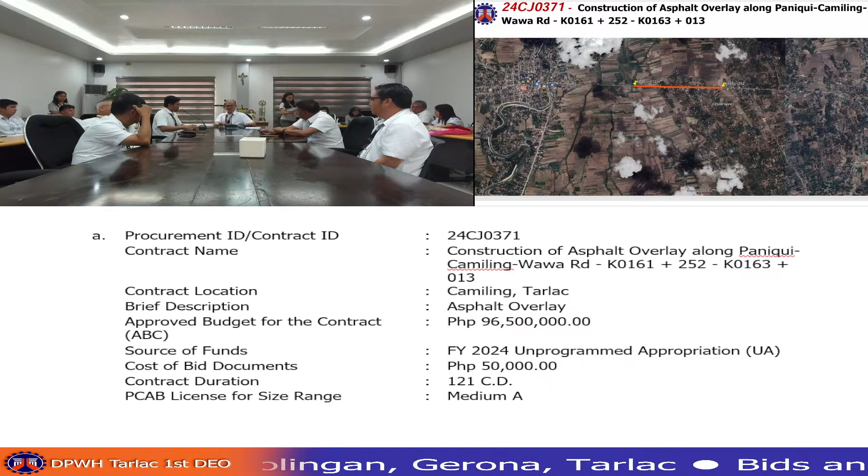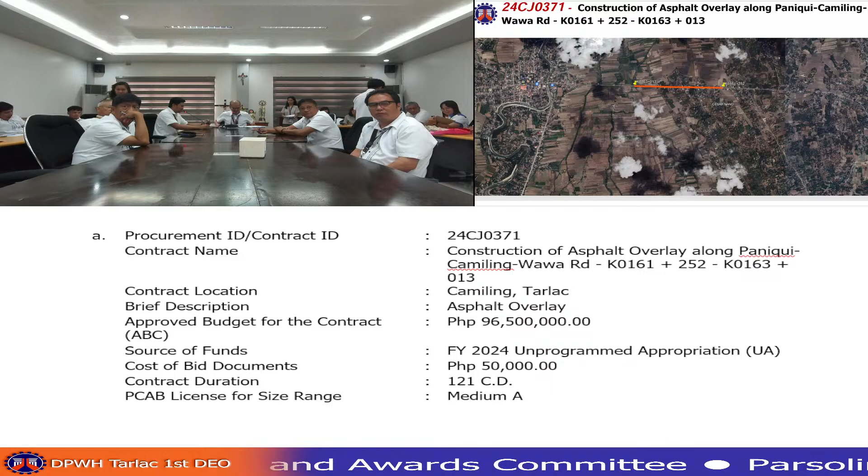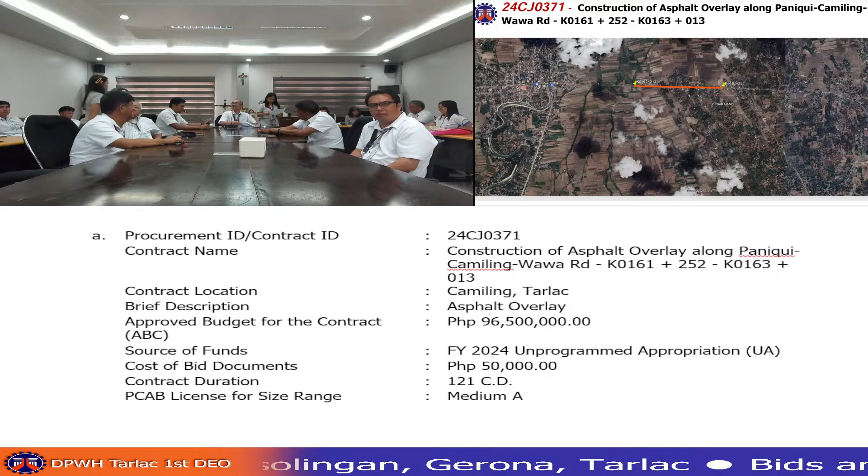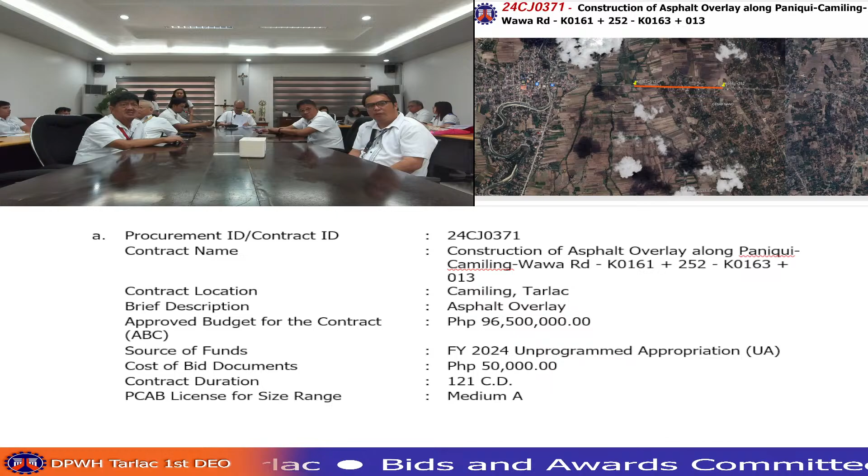For the contract ID number 24CJ0371 with the contract name of Construction of Asphalt Overlay along Paniqui-Camiling, Wawa Road from kilometer 161 plus 252 to kilometer 163 plus 013 located at Camiling, Tarlac. Scope of work with a target length of 1.765 kilometers or equivalent to 6.492 lane kilometer. Asphalt overlay of 4 lanes with a width of 12.3 linear meters and a thickness of 100 millimeters. Reblocking of deteriorated concrete pavement within limits, including application of reflectorized thermoplastic pavement markings white with a duration of 121 calendar days.

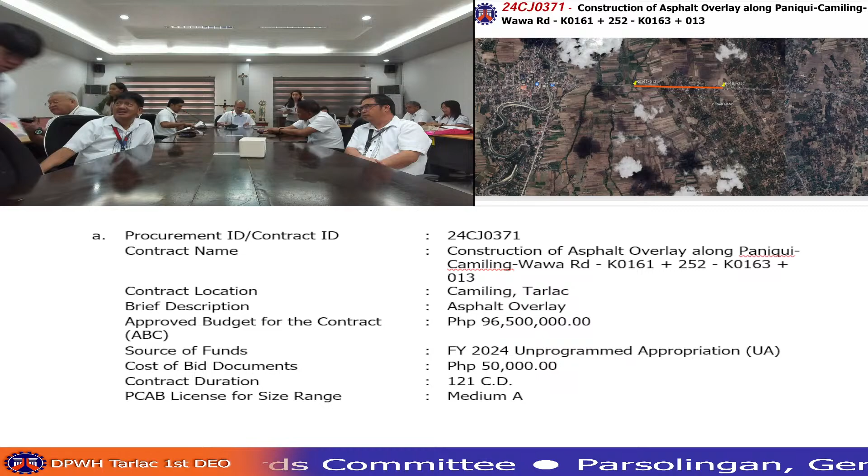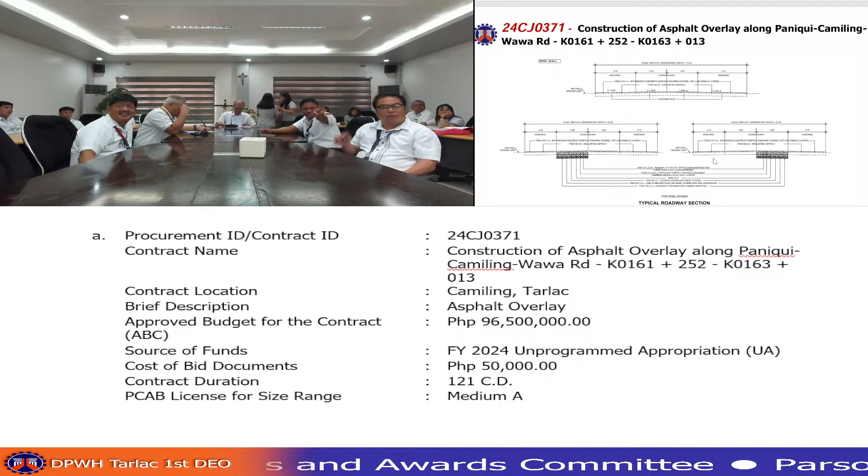Iflash mo yung cross-section. So, Engineer Aboy, wala ka bang tanong dyan sa cross-section? May nabanggit ka reblocking dyan? Eh, yung rotomill, meron? Wala. Meron ka pang project niya? Meron ka pa? Meron pa? Wala na. Ituloy mo na sana. Wala na. Oh. Okay, thank you, Engineer Tulang.

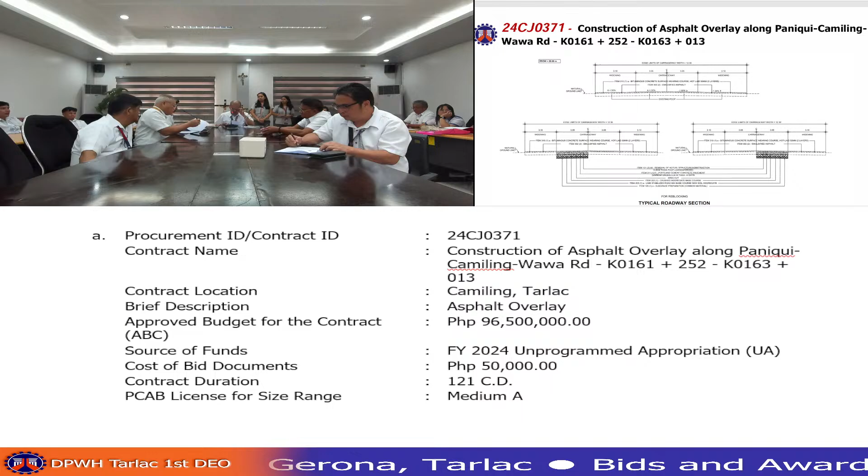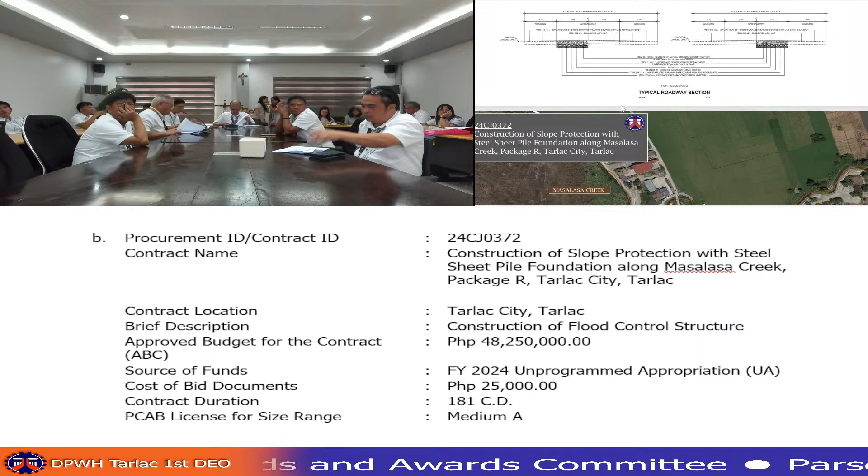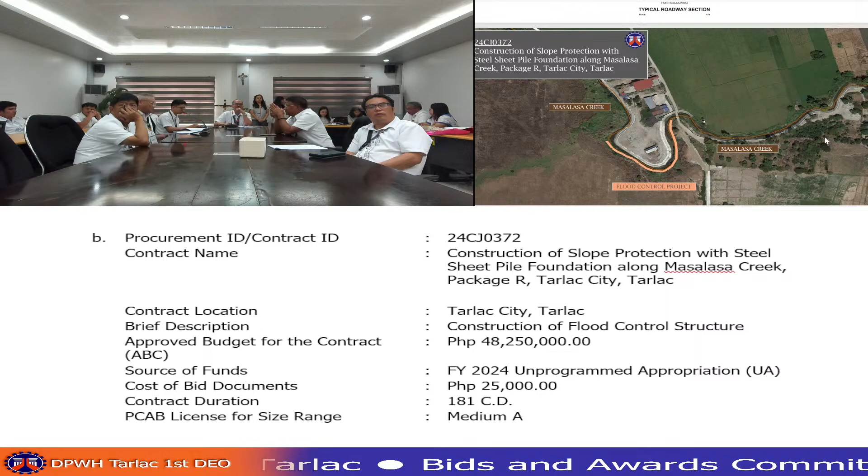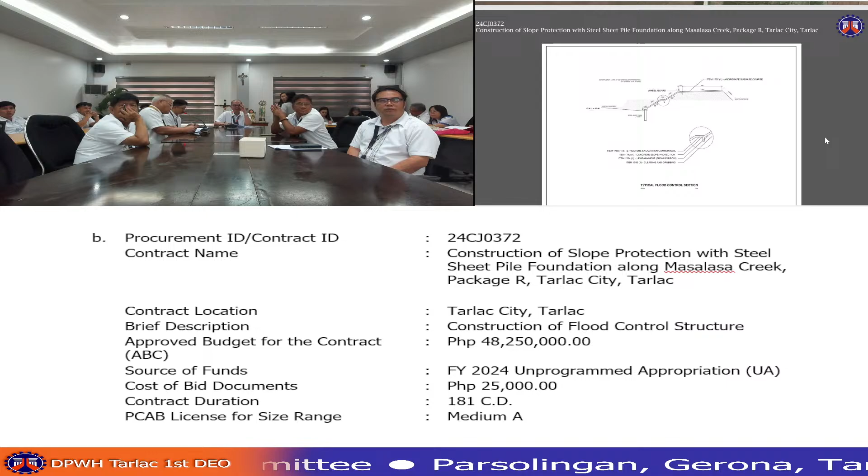The presentation also includes a typical flood control section which features a two-slope flood control structure with a length of 3.5 meters.

Wala tayong tanong? Wala po siya, sir. Agree. Yes po.

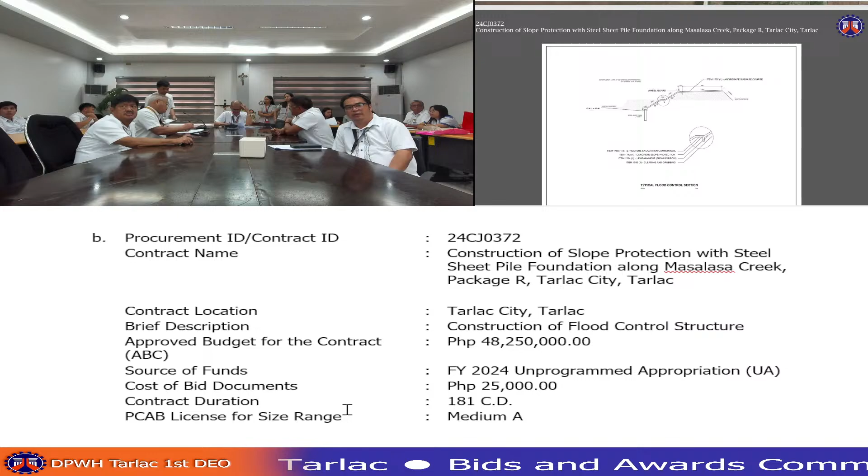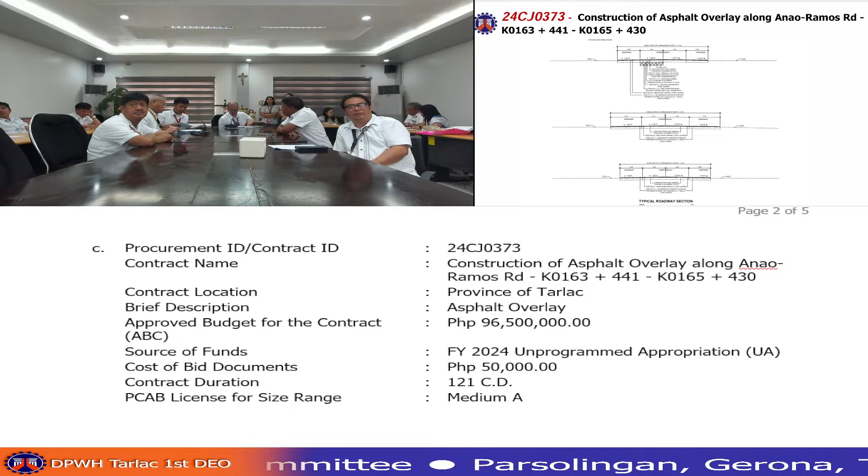Hello, good morning. For 24 CJ 0373, preventive maintenance asphalt overlay along Anao Ramos Road from kilometer 160,663 to kilometer 162,419 located at Ramos, Tarlac. And the scope of work has a total of 1.756 kilometer or 5.397 lane kilometer target asphalt overlay of 2 and 4 lanes with a width of 6.7, 10, and 13.4 linear meter and a thickness of 100 mm. Reblocking of deteriorated concrete pavement within limits. It also includes installation of single-arm solar LED roadway lighting with the specification of 12-meter pole, 3M mast arm with 30 watts luminaires and other road safety features within limits. Also includes application of reflectorized thermoplastic pavement markings, white and yellow, and it has 121 calendar days.

Oh, yun unprogram yan. Unprogram of operation yan. Saka parang dire-diretso siya, no? Miski na yung isa. Wala siyang exemption, no?

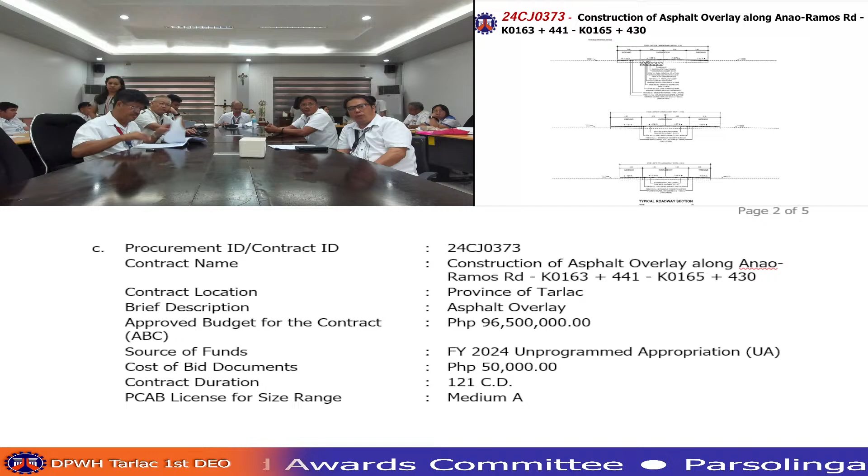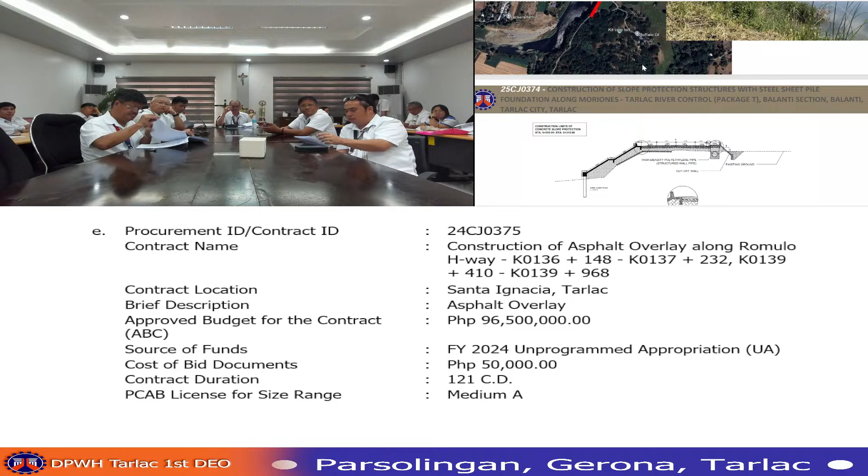The next one is 24 CJ 0375, preventive maintenance asphalt overlay along Romulo Highway from kilometer 134 plus 410 to kilometer 136 plus 148 located at Santa Ignacia, Tarlac. Scope of work, it has a total length of 1.733 kilometer or 5.920 lane kilometer target. Asphalt overlay of 4 lanes with a width of 13.4 linear meter and a thickness of 100 mm. And it also includes application of reflectorized thermoplastic pavement markings, white and yellow, and it has a total of 121 calendar days.

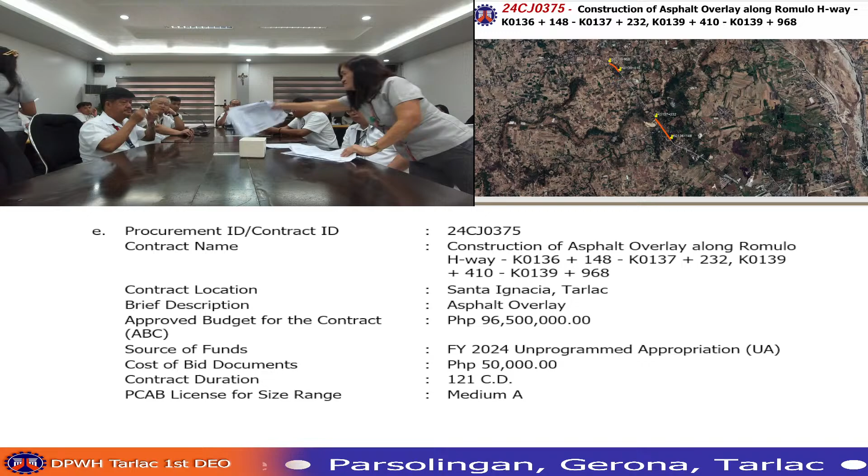So, meron siyang, pero based on that, meron siyang exemption ngayon, ano? Meron siyang exemption, ayan. Pero matanong ko lang, ha? Anong barangay yung sakop nung isa roon tsaka yung sakop nito? Dapat kabisado mo, kasi magkakartisikol ka sa kapitan, eh. May ano siya, meron siyang reblocking. Puro diretsong asphalt. Pero yung magbabakbak wala. O yung rotomill wala. Alright.

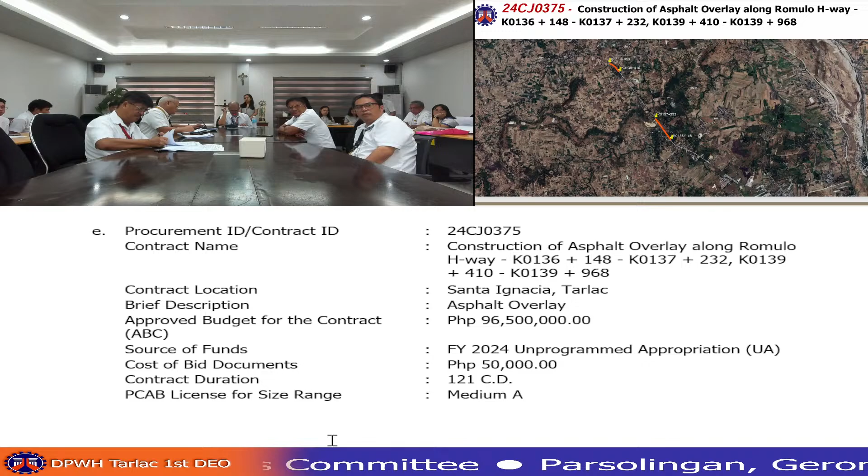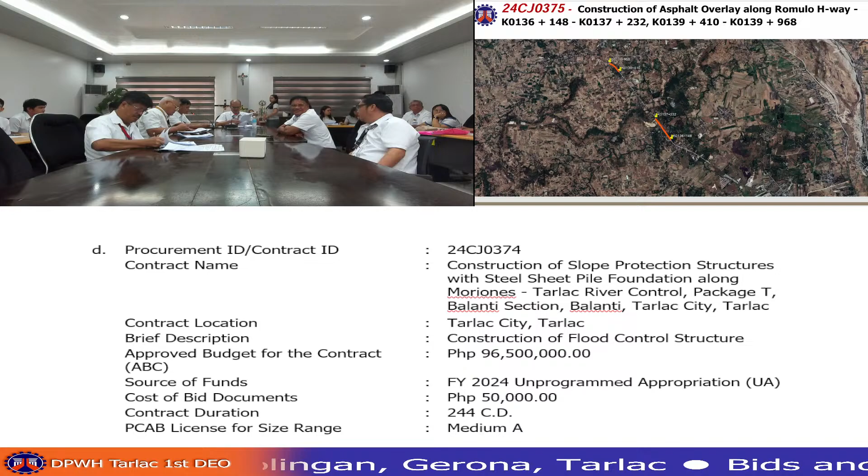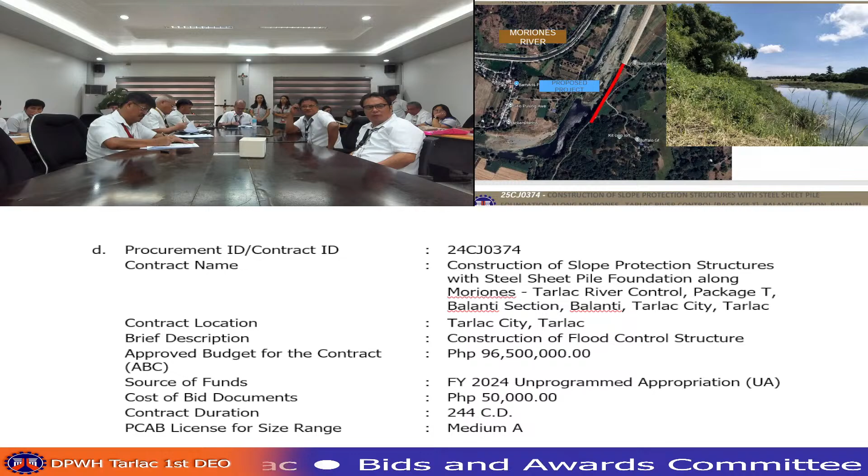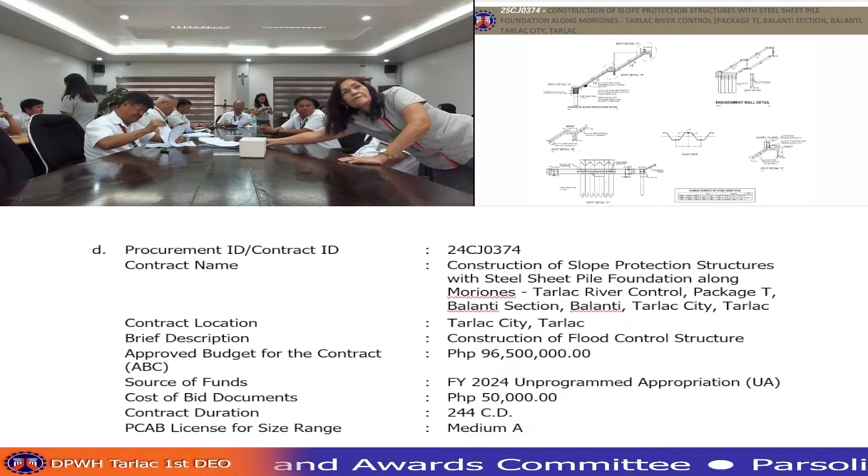I'm Zaldi Olivares from Planning and Design Section, and I'm going to introduce the contract ID 25CJ 0374, construction of slope protection structures with steel sheet pile foundation along Moriones Tarlac River Control, Package T, Balanti Section, Balanti, Tarlac City, Tarlac. It has a target length of 319 linear meters with a total project duration of 244 calendar days. The approved budget for the contract is 96,500,000. The scope of works includes earthwork consists of clearing, grubbing, removal of structures and obstruction, excavation and embankment, and crushed aggregate base course. Surface courses with 0.15, 0.23, and 0.30 meter thick of Portland cement concrete pavement with a width of 1.5, 4.67, and 6.7 meter respectively. Drainage structures with structured wall pipe high density polyethylene pipe 1000 millimeter in diameter. Miscellaneous structures with curb and gutter precast. Bank and slope protection work with the length of steel sheet pile to be used is 9 meters.

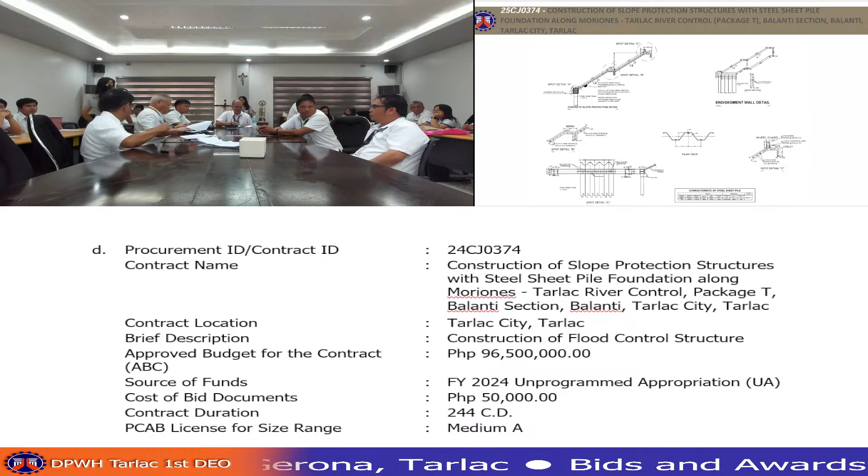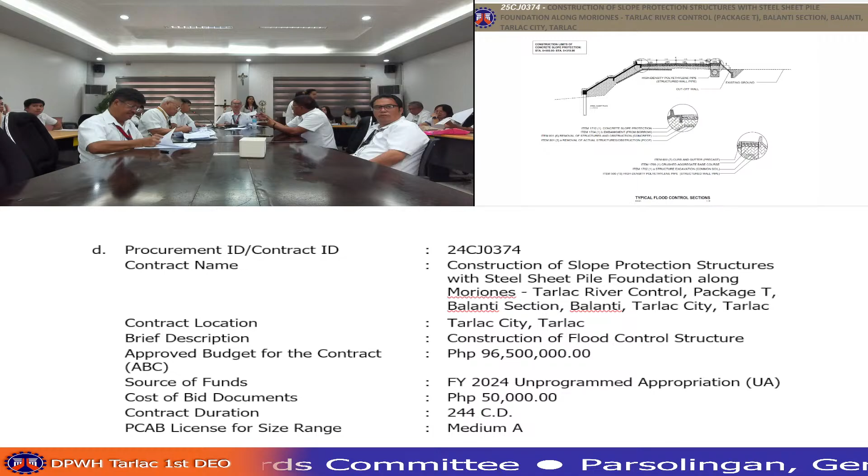Sige, pare, magtanong nga. Balanti section, sir, cross section, sir. Geotextile. Wala siyang wala. Ah, ano yung nasa ilalim na yun? Sir, may kwan dyan, existing na slope siya tapos may road. Kaya may kwan siya, removal of structures and obstruction. Yun ang tatanggalin. Yes, sir. Akala ko papatungan mo lang. Ibang kwan yan, sir, ibang design. Iba, okay. Sa may balanti, sa may grotto po banda yan. Wala siyang street light, sir. Yes, sir. Yeah, may existing po, apo.

Yes, sir. So, thank you.

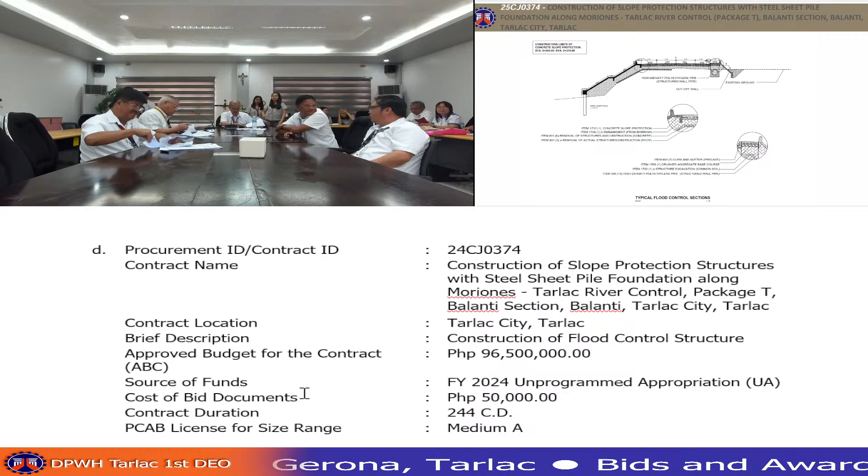Thank you, Engineer Olivares. We call on Engineer Mario Villanueva Jr. for 24 CJ 0376.

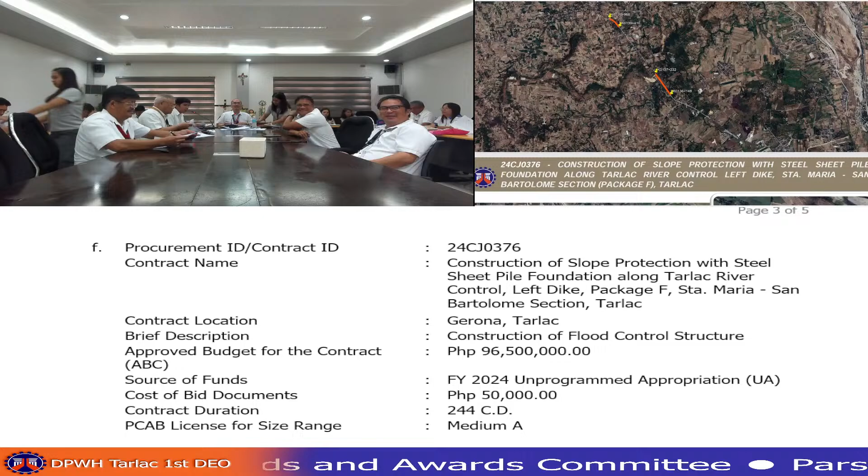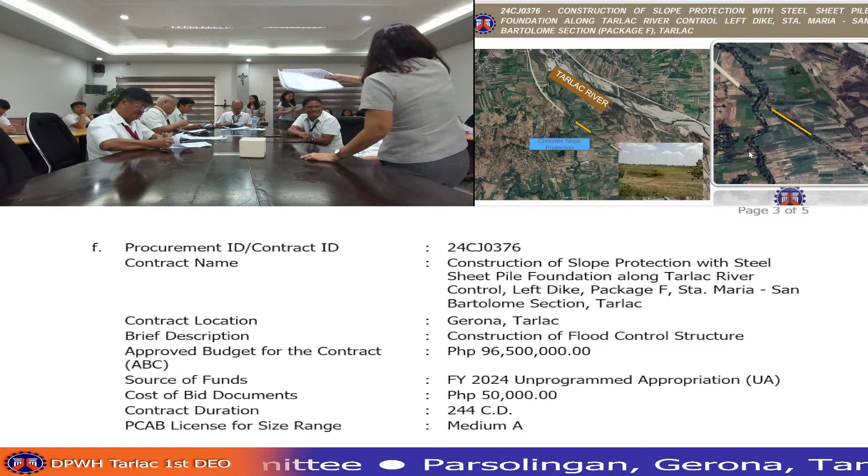Good morning, everyone. I am Mario Villanueva Jr. from Planning and Design Section. I'm here to present Project ID 24CJ 0376, construction of slope protection with steel sheet pile foundation along Tarlac River Control Left Dike, Santa Maria to San Bartolome Section, Package F, Tarlac. It has a target length of 331 linear meters, concrete slope protection with project duration of 244 calendar days.

ABC amounting to 96,500,000. The length of steel sheet pile to be driven after the concrete coping is 9 meters. The scope of works comprises miscellaneous structures with metal guardrail including post single W-beam, earthwork with 0.2 meters thick aggregate sub-base course, and lastly, bank slope protection work.